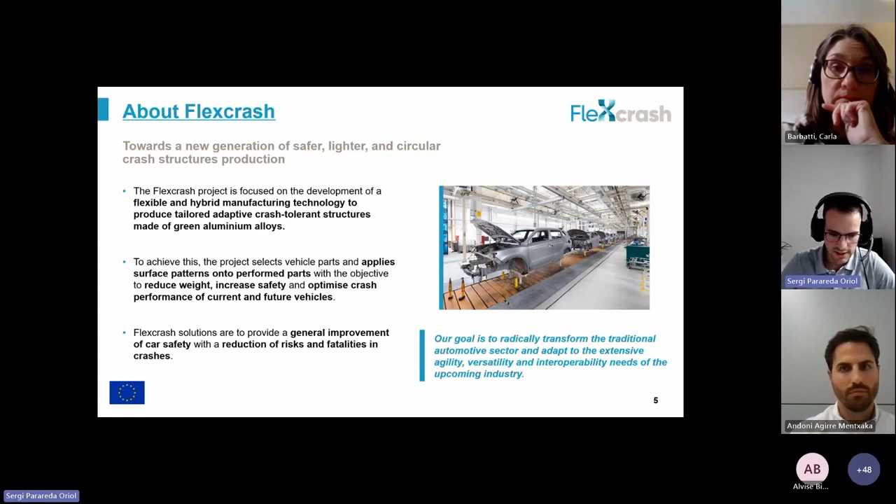And to obtain these crash-tolerant structures, the project is focused on developing new surface patterns on some strategic points of the vehicle that will help to reduce the weight of the vehicle, of the new components, but also to increase the safety of the vehicle, and of course reduce the risk and fatalities in crashes.

So with these different points, the Flexcrash project will contribute to the European automotive industry by obtaining more sustainable and lighter vehicle structures. So as I mentioned, by using these green aluminium alloys and these new techniques, we'll be capable of obtaining these new lighter structures that will perform much better in crash situations. This point will help to achieve the European Union emission targets, by reducing greenhouse gases by 40% by 2030, which is also aligned with the European policies for a cleaner and more competitive Europe.

So the main aim, as you can see here on the right-hand side of the slide, is to obtain low weight components that can perform better in terms of crash, but also that can help to reduce the CO2 emissions and the greenhouse gases of the vehicles. So in order to achieve this, basically we are facing two different points. One is vehicle lightweighting, so to reduce the weight of the vehicle, and the other one is to increase passenger safety. And these are the main points of the project.

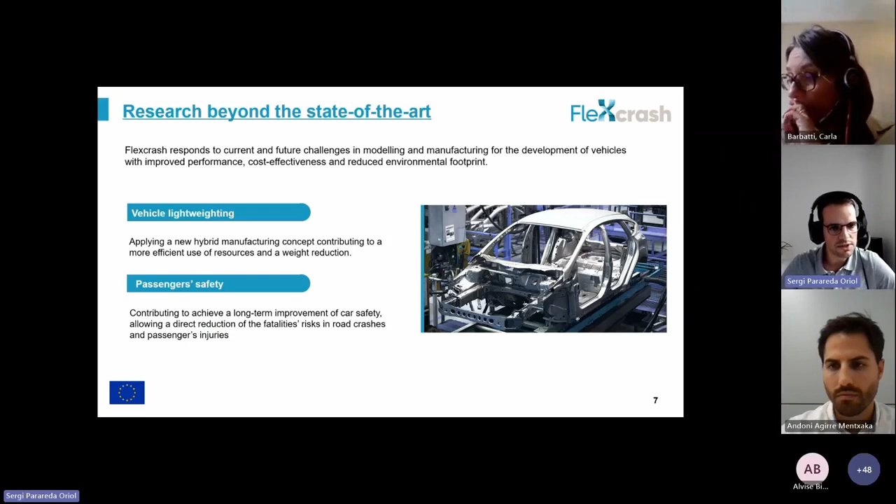So the project is mainly focused on working in this area, and the expected results were expected to be the crash simulation from advanced material to virtual testing. So cover all the chain, from the very beginning, identifying which are the most critical situations in crash scenarios, and then working on the different materials and different solutions that we can bring to deal with these situations. Then obtain these flexible and hybrid manufacturing technologies to bring to the automotive industry another tool to address the new requirements that can appear in the future.

Obtain these new crash tolerant structures with lighter vehicles as well, and then also work with advanced testing. So the main idea is to develop new tests to obtain or to characterize the materials that we are using in terms of crash, toughness, fatigue, a lot of different mechanical properties in a fast way. So in this way, we can reduce the time required to implement all of this knowledge that we are developing here in this project.

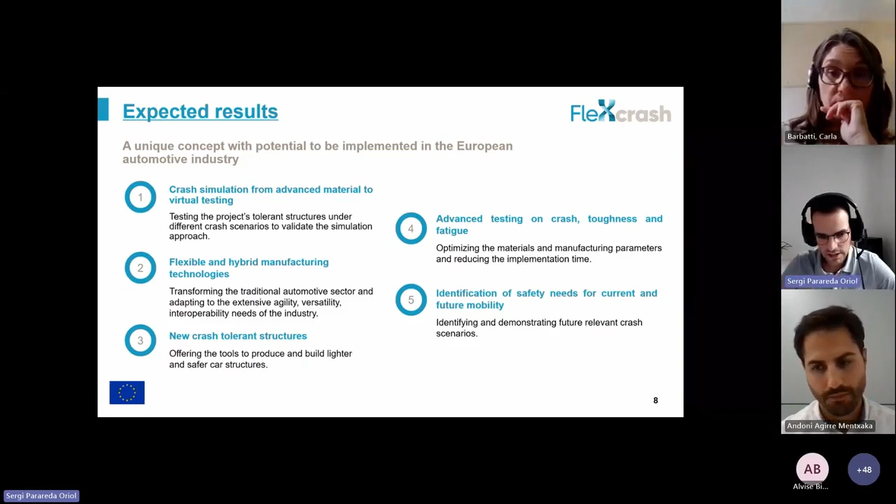And finally, related with the first point, identify the current needs in terms of safety, but also the future needs that will appear when we will have these autonomous vehicles and also the conventional vehicles, let's say, and what will happen in these scenarios.

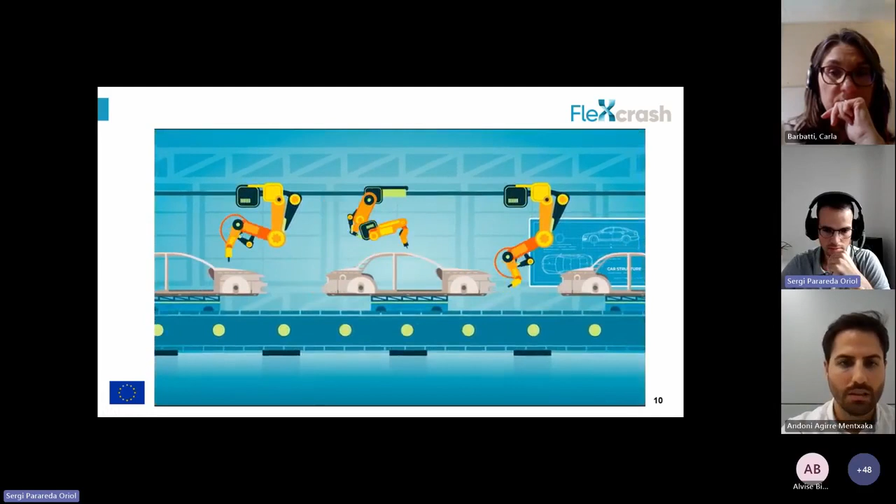Road crashes are a serious concern for everyone who gets behind the wheel. And while the European Union aims for a 50% reduction by 2030, progress towards this goal has been slow. The Flexcrash European project takes on this challenge to transform the automotive sector. Flexcrash is dedicated to developing flexible and hybrid manufacturing technology that produces crash-tolerant vehicle structures. At Flexcrash, our focus is on designing safer vehicle structures by locally reinforcing critical areas in a crash event. This approach increases passenger safety and reduces fatalities across a wide range of crash conditions.

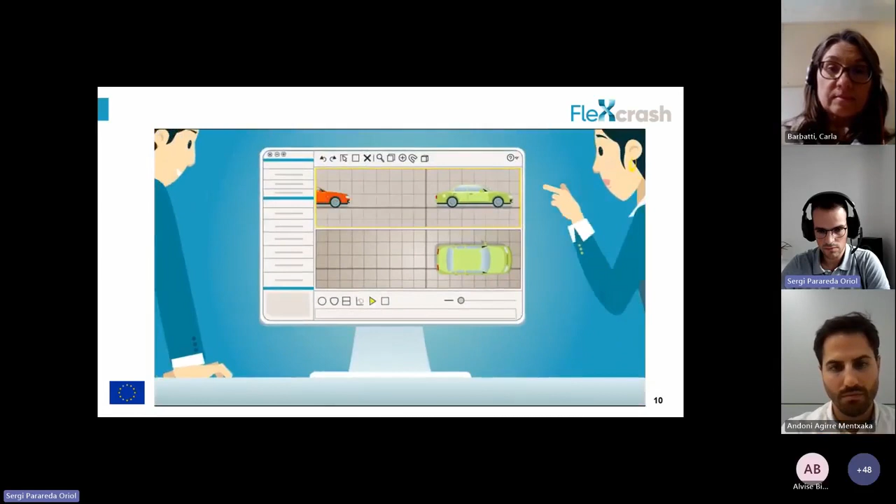By seamlessly integrating high-strength green aluminum alloys into its car structures, Flexcrash achieves both lightweight and sustainable chassis, maintaining their impact resistance and minimizing their environmental footprint. To ensure that Flexcrash structures meet the safety needs of current and future mobility, they will undergo rigorous testing, which includes advanced material models, different crash scenarios, and virtual testing. An initiative supporting the EU long-term goals on zero emissions mobility, reduction in injuries and fatalities due to crashes, towards safer and lighter crash structures. The Flexcrash project has received funding from the Horizon Europe program.

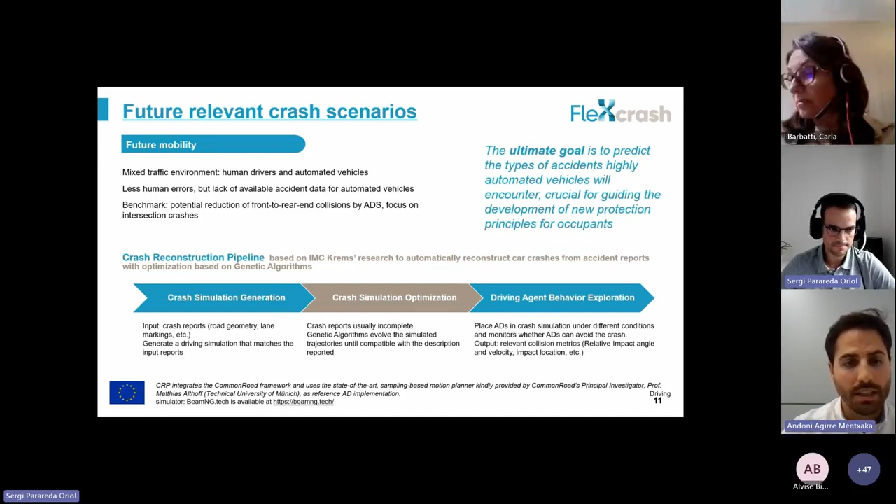So once the simulation is set up, we can place the autonomous driving system into the simulation and see how it reacts and which is the consequence of this collision, so that we can get as an output all the relevant collision metrics, such as the impact angle, the velocity, the location of the collision, and so on. So if we move to the following slide, what we have done is we have cross-checked the output of this tool with the benchmark, and we have identified three main crash scenarios for this project.

So the first one on the left is the straight crossing path, where we can see the blue car going straight, that it's impacted from the left side. The second one, which is a left turn across path, in this case in lateral direction, because the blue car is turning left. And the third scenario that we have identified is also similar to the previous one, but in this case it's in opposite direction because the green car is coming from the front.

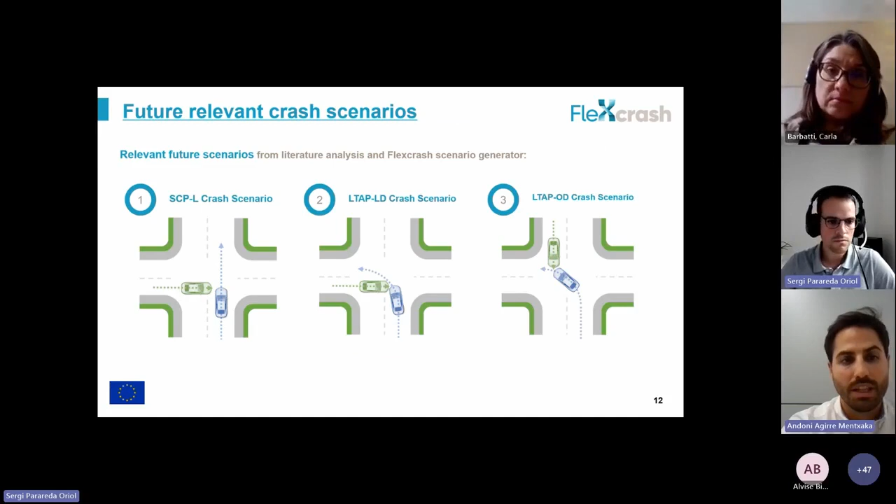So this statement is quite clear and quite simple, but all the implications behind are quite complex because we need to take into account legal requirements and the protection not only of occupants but also of pedestrians, many variables in terms of speed, in terms of impact angle, overlap, proportion of overlap between different cars, compatibility, and of course, economic factors that we always need to keep in mind, and sustainability and ecological factors that are fundamental in this project.

So in order to achieve this goal, we're going to combine three pillars. On the one hand, we will have a passive structure that will consist of aluminium parts manufactured by traditional technologies, let's say, for example, extrusion or die casting.

But on top of these parts, we will add some added value functional features by additive manufacturing in order to have a more robust design in terms of crash angle, speed, and so on, and eventually reduce the weight of the structure. And on the other hand, the aim is to integrate also an active system that will somehow allow the structure to adapt for each crash scenario, having a complete robust system.

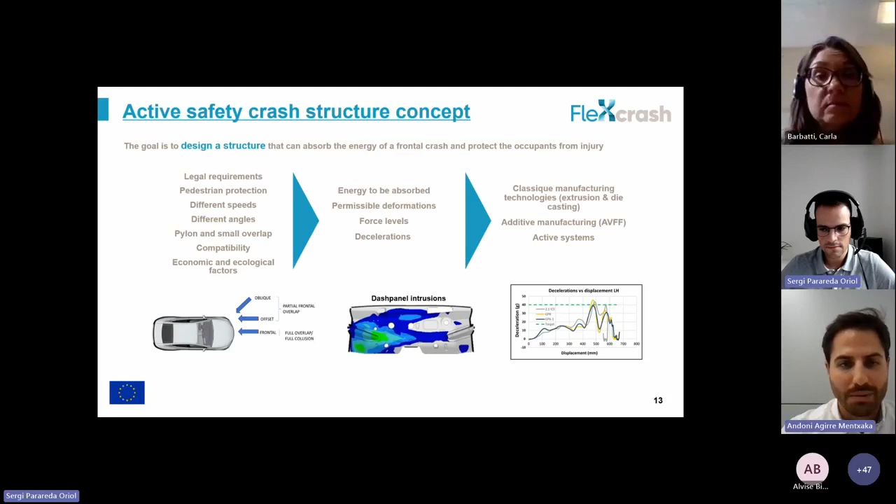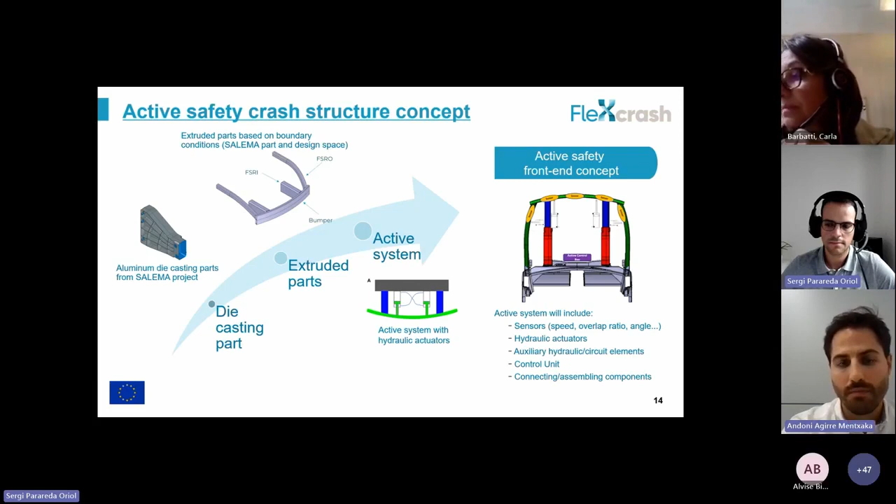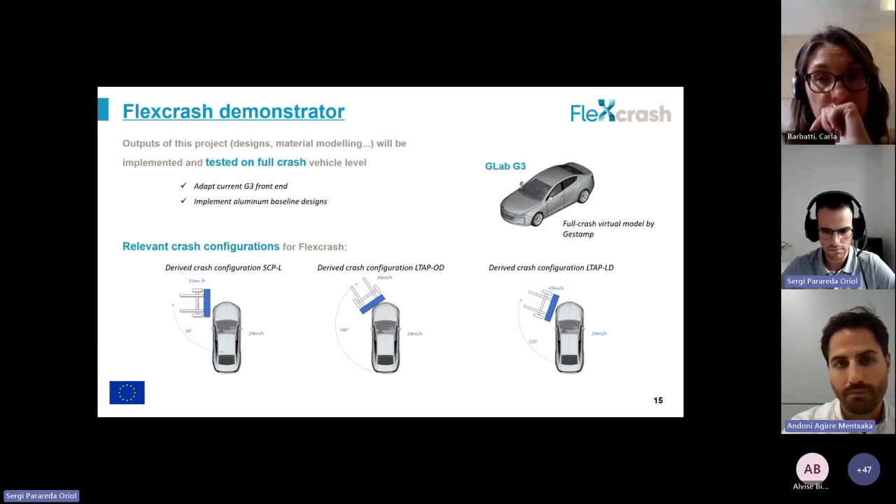And we will simulate three crash scenarios that are based on the three cases previously identified and mentioned. So we will have a first one with a relative angle of 89 degrees between the barrier and the vehicle, another one with a relative angle of 146 degrees, and a final one with a relative angle of 110 degrees. So this was all from my side.

I give you back the floor, Sergi. Thank you, Andoni, for the nice presentation.

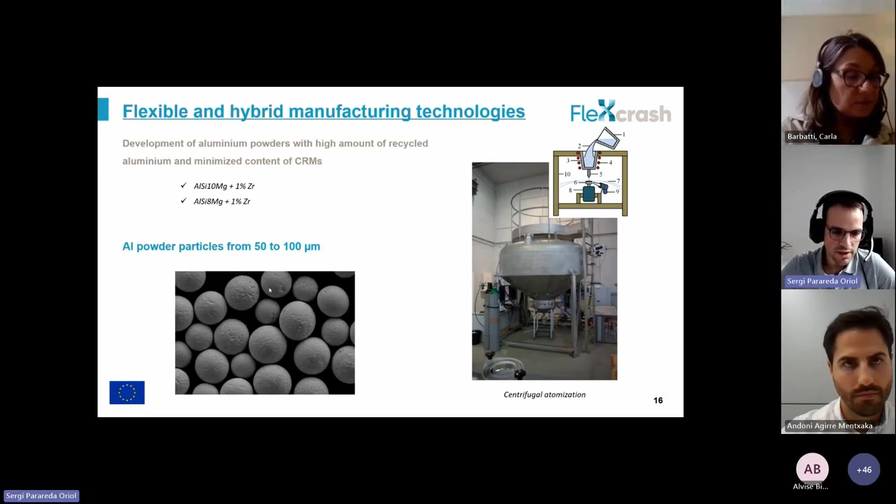This is, let's say, quite simple to see how it works, but then it's not that simple to produce this powder. So the process is mainly based on melting the material and then dropping this melted material on a spinning disc that spreads this aluminium alloy inside the tank, and we are producing these small particles of about 50 to 100 microns that are then used here in the laser metal deposition machine.

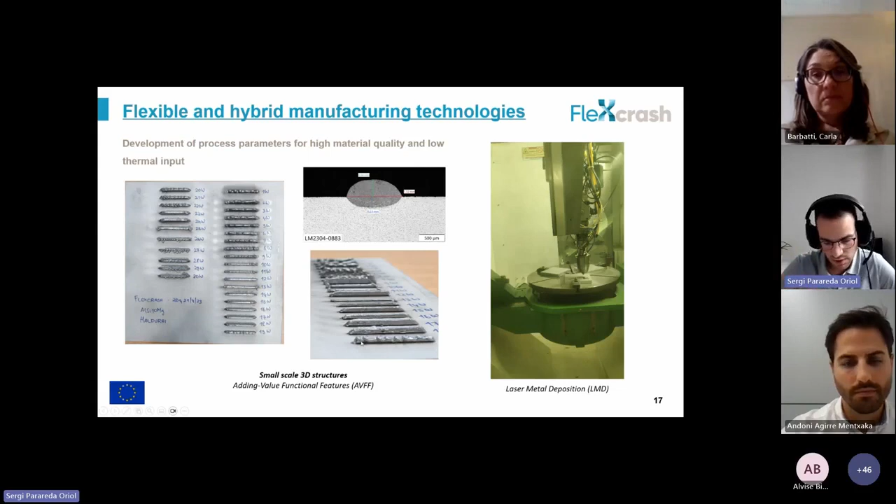So in order to obtain the best shape or the lower thermal effect in the base material, and the best conditions to obtain these properties, or this AVFF with different shapes and so on. And then once we have these conditions, the idea is, as mentioned, to improve the mechanical behavior of these profiles here.

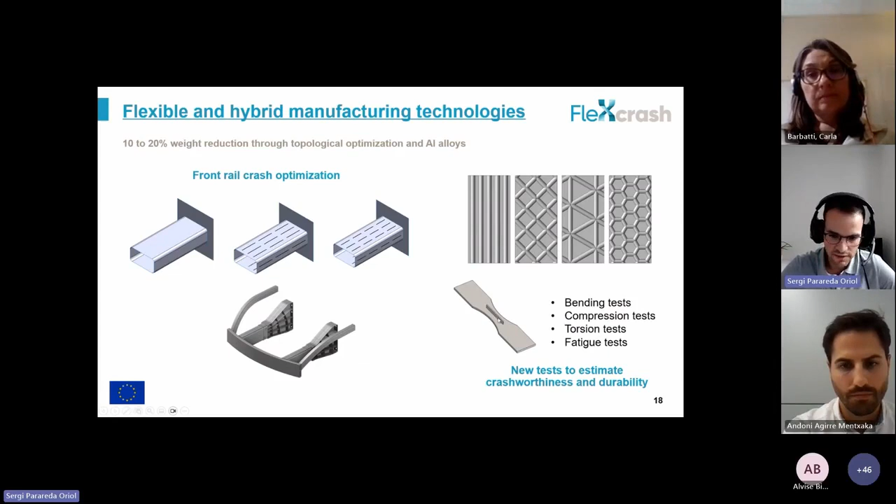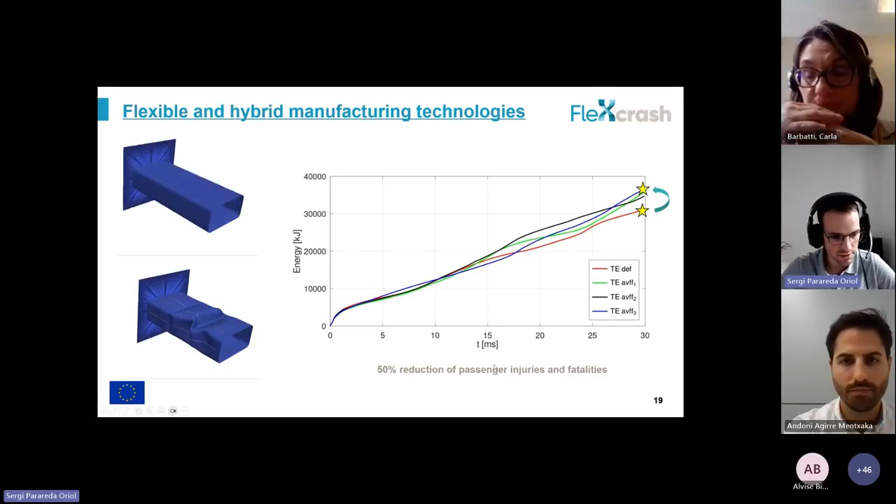So right now we did just a first approach and a first attempt proposing some simple patterns, but then it's expected that with more complex patterns we can obtain even more absorbed energy. And of course, this will have an effect on reducing passenger injuries and fatalities, since the material will be able to absorb much more energy.